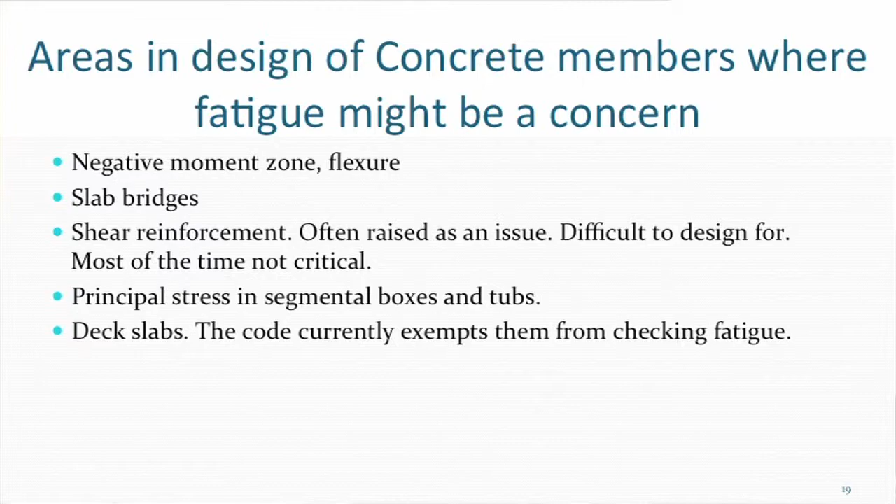T10 is the committee that deals with the concrete bridge specifications, Section 5 of the AASHTO LRFD bridge design specs. AASHTO is the American Association of State Highway and Transportation Officials. T10 is a subcommittee of the subcommittee on bridges. It's a very elaborate, detailed organization structure.

T10 is the committee that decides what to change in terms of design rules for concrete bridges, including the use of welded wire reinforcement. So a few years ago, probably early 2000s, about 10 years ago, we were asked by WRI, and we got additional funds from PCI, and we did elaborate testing from different sources to check on the fatigue resistance of welded wire reinforcement with cross welds in the wire or specimen, and without cross welds.

Now T10 is looking at a proposal from one of the giants of the industry, John Kulicki. He's the guy who developed the AASHTO LRFD specifications, so he has to be taken very seriously. He's now retired from Modjeski and Masters, but he carries a lot of weight, and he did a research project for extending the lifespan of bridges.

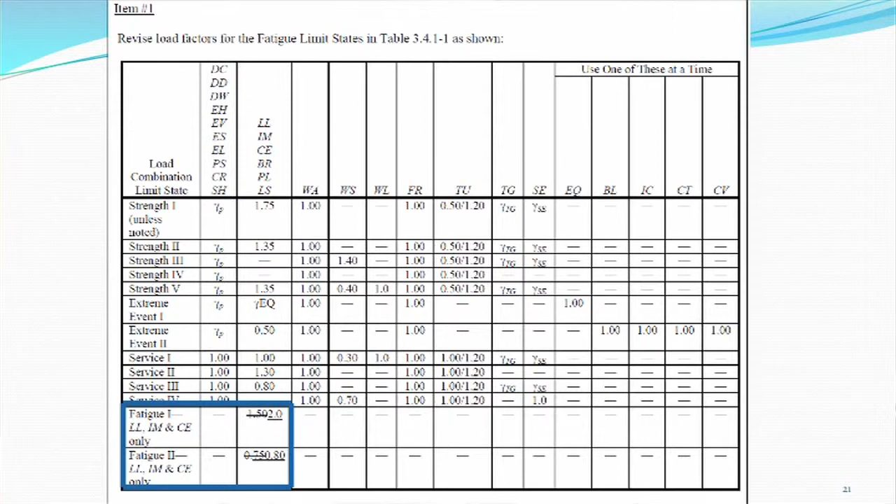The summary of it is this: as Todd said, for the fatigue 1 limit state, which impacts us here, the load factor is changing from 1.5 to 2. That's about a 33% increase. So the loads that you're designing your structures for are increased by the ratio 2 over 1.5 across the board, whether it's a concrete bridge, concrete structure, any transportation structure, concrete or steel. You take the loads and multiply them by 2 instead of 1.5. That's one effect.

The second effect: they took our beautiful fatigue formulas, if you call them beautiful because I developed them, and destroyed them.

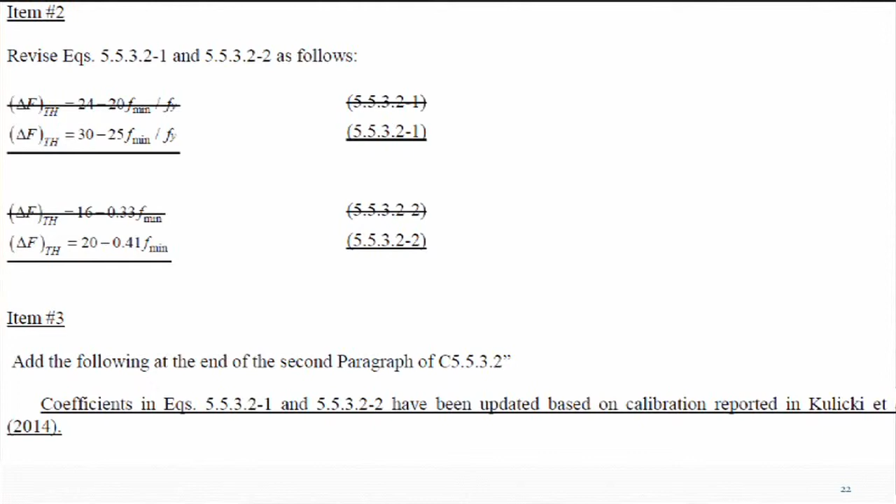What they did, and they have a very scientific justification which in my opinion is just to put stuff in there so they can tell the world they've done something, is they took the limits and increased them. So 24 becomes 30, and so on. This is the limit for wires with no cross wires welded, and this is the limit for wires with cross wires welded at the high stress zone, the high stress section that you're checking.

The good news is they're increasing the limit. So even though they destroyed my baby, this is a good thing for you because they increased the limit. So when they increase the limit and they increase the load, it's a wash. The load, the demand on one side, the capacity on the other side — I'm increasing the demand, and I'm also increasing the capacity by the same ratio. Okay, fine, if that's what you want to do. It's not going to affect us economically.

The alarming part about this is that when you look at the language as you move through the working agenda item, you see some tables in there that reduce the limits. These tables come from the original report that they submitted as evidence. So someone on T10, because that's all part of the submittal, is going to pick on this, because my associates in the company, when I asked them to review this presentation, said okay, there's inconsistency here — which one? So they picked it. So if someone on T10 says we want the low limit, then we're in trouble.

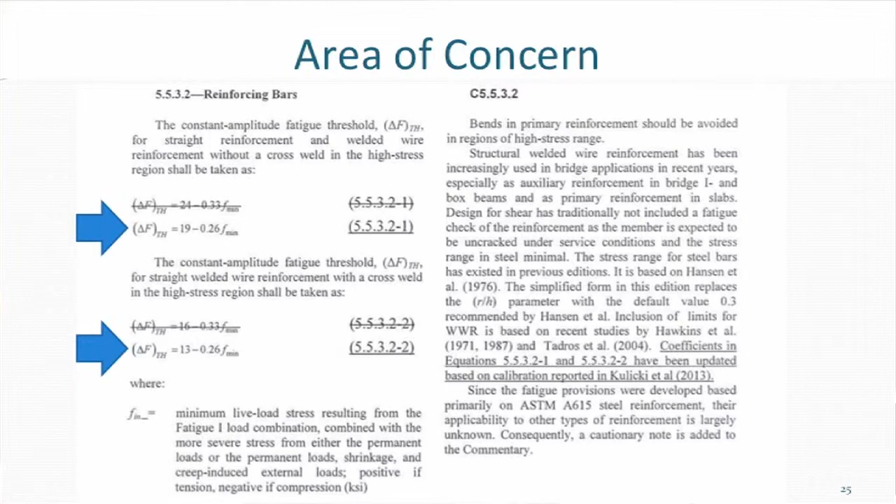That's why this has to be watched carefully. The reason I'm saying that is the justification they use, Monte Carlo simulation and some really fancy stuff, fancy words, life cycle analysis and all that stuff, is not really what we did.

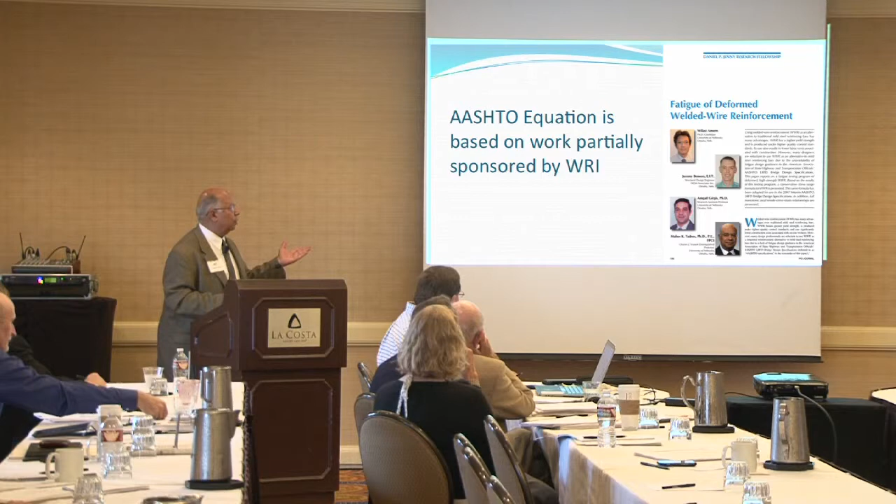What we did was very simple for the Wire Reinforcement Institute. We took a whole bunch of samples from a lot of sources, and we figured that the stress range plus one-third of the minimum stress has a lower bound of 16 KSI. So we said the stress range minus 0.33 F minimum, the live load 16 KSI minus 0.33 F minimum, is the limit of stress range. It's just as simple as that.

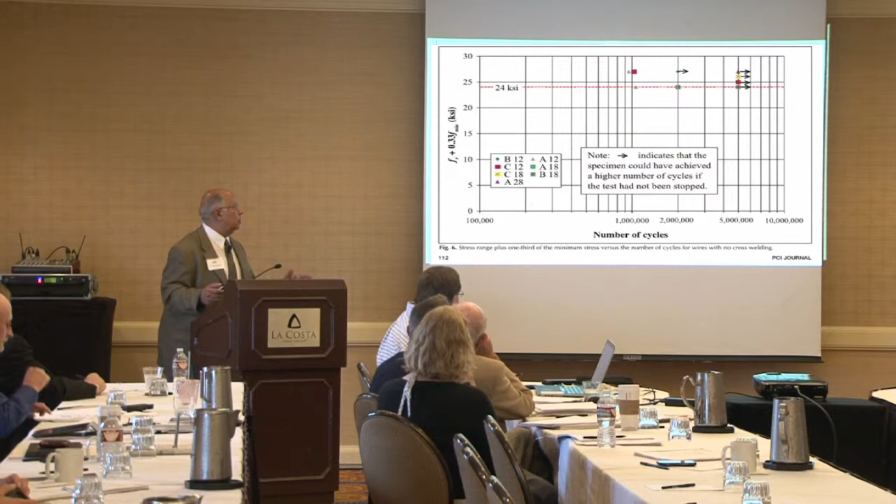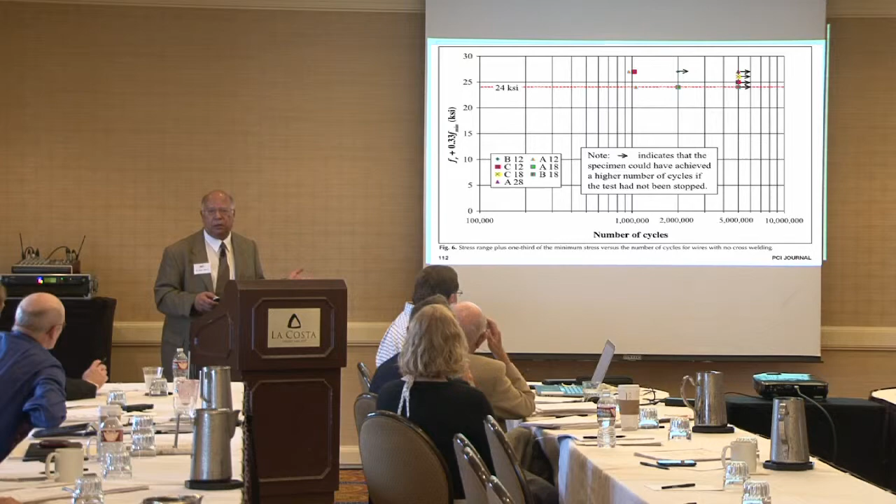And when you have wires that are plain, straight wires without any cross welds in them, the limit goes up to 24. So this would apply to bars, and this would apply to wire as well if you're not welding in the high fatigue zone.

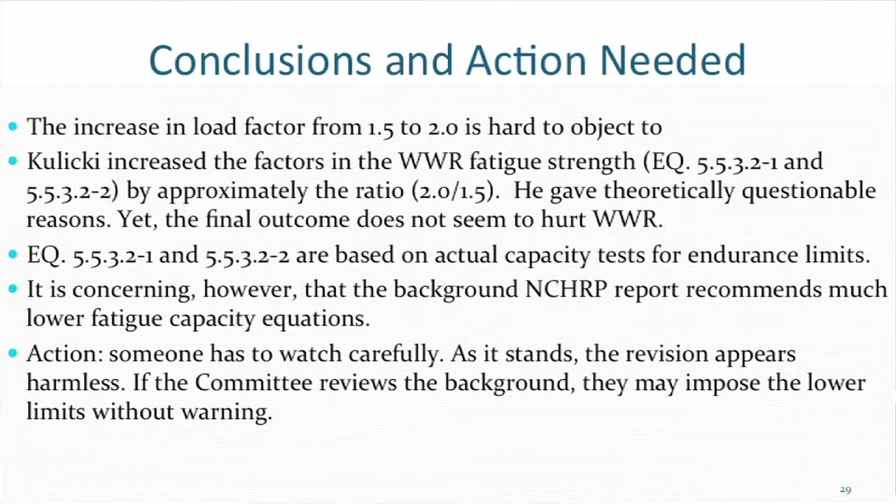So in conclusion, I'll leave this slide on here for a second. If you look at it casually, no action is required. If you look at it a little more seriously, you need to be very vigilant, you need to be watchful, and you need to attend these meetings to make sure that if they make the change, they stick with the change they propose in the working agenda item, not the background information attached to it.

It's probably a little bit on the light side now that we've gone through fatigue. There have been numerous applications in the past 20 years, and the credit goes to your very active members. I have to single out Dyke Starnes. Dyke is one of my idols, he really works hard. When I was in Florida in 2007, 2008, we teamed up and went to Tallahassee, and he's tireless. This has been a help to the whole industry.

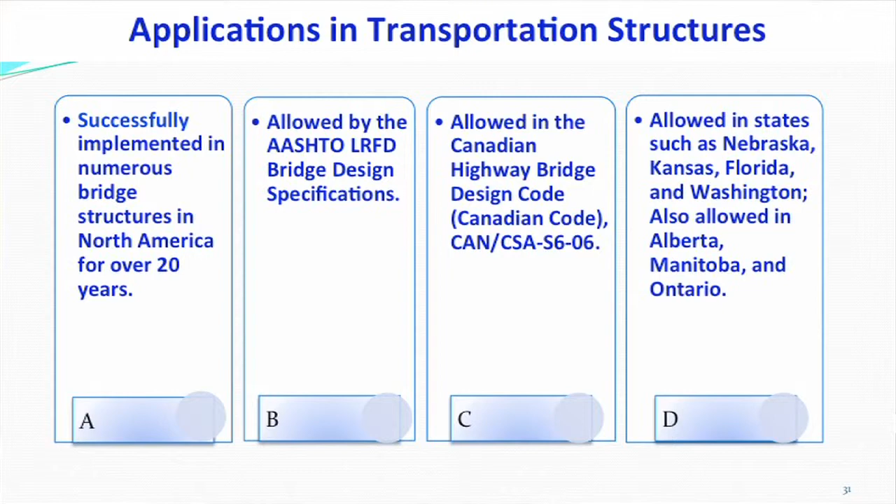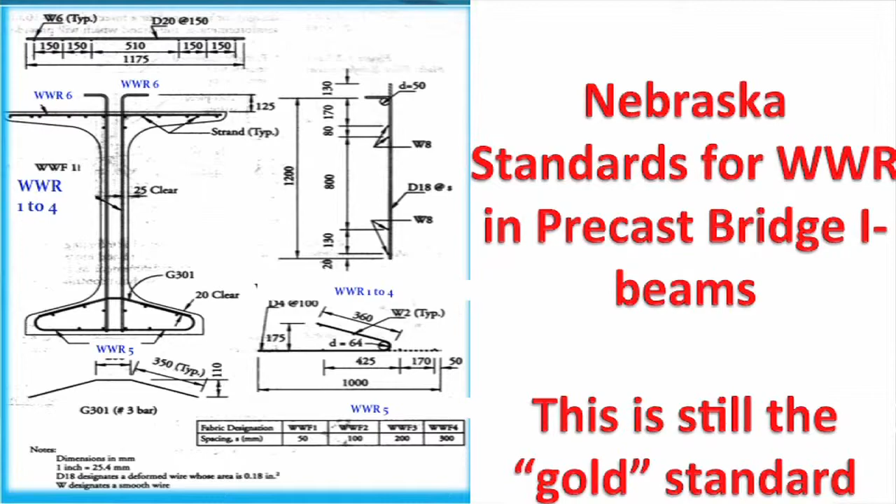And I also have to brag about Nebraska. This standard was introduced in 1992. I consider it the gold standard. It made it to the PCI Bridge Design Manual. It's what people use most of the time, unless they get to be too fancy. That's what people use in detailing I-beams.

You could see that everything here is welded wire reinforcement. Everything, nearly everything, almost everything. The only thing that's not welded wire reinforcement is this tiny number 3 bar. Everything here is WWR, 2 U-shapes meshed together. This is the main reinforcement, WWR. The top flange reinforcement is WWR.

You see that you have 2 wires at the top, minimum 2-inch spacing. These happen to be a little bit longer. And these are 2 wires at the bottom. An excellent detail. It has served well.

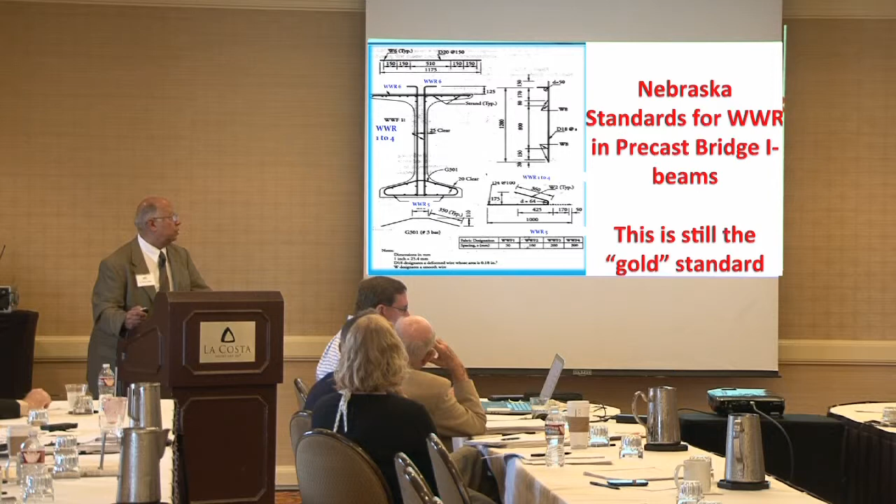I was on sabbatical that year with a friend at HDR's office in Omaha, and we sat down and developed this standard, and it worked very well. It has worked very well. In the PCI Bridge Design Manual, that's what's guiding people to do.

A recent development here that I think I like, but I need to get your reaction because it hasn't been done before, this is going to be the first time it is done. If the concrete option wins and if this detail is adopted, it is to take the cross wires and put them above the cross section. When you do that, you have more anchorage of the wires.

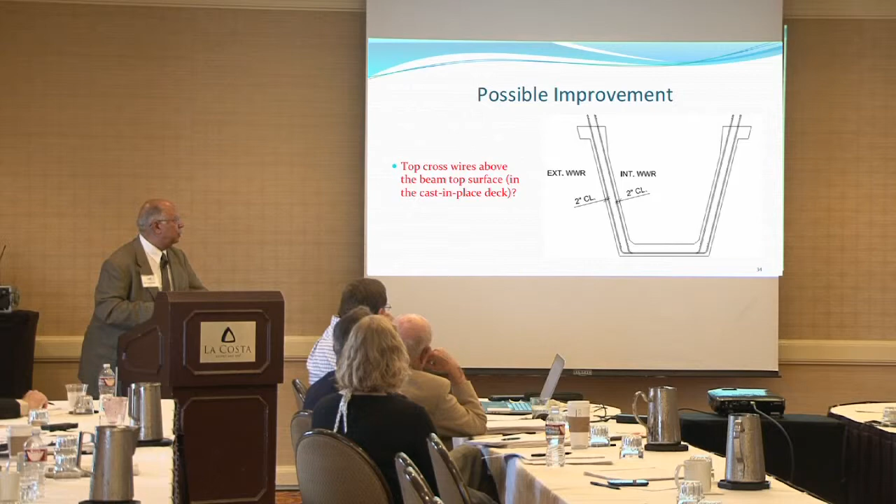And we have a kind of a stay-in-place deck form here. So the stay-in-place deck form will be below these anchors and they will go into the deck. So that's a detail that we think we've already gone through the initial screening and it seems that everybody's happy with it. The rest of the details are very similar to what's being done now on Bogey Creek Bridge, supplied by InSteel. One U-shape here and one U-shape here.

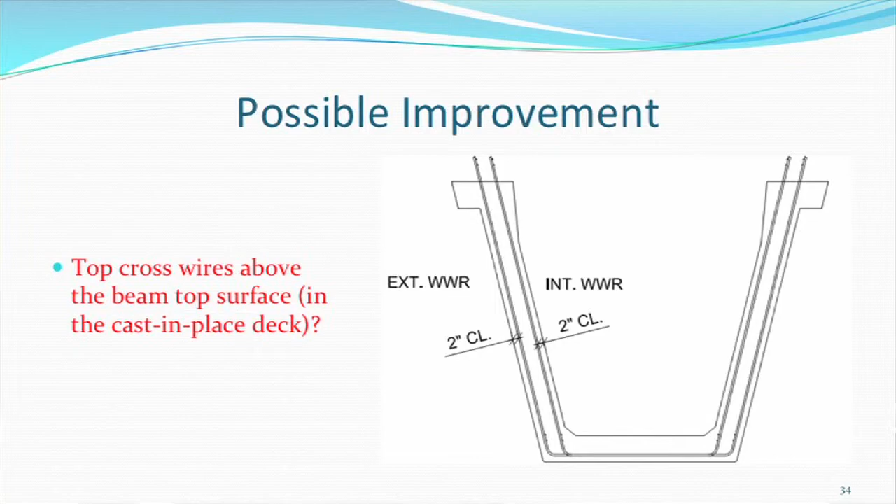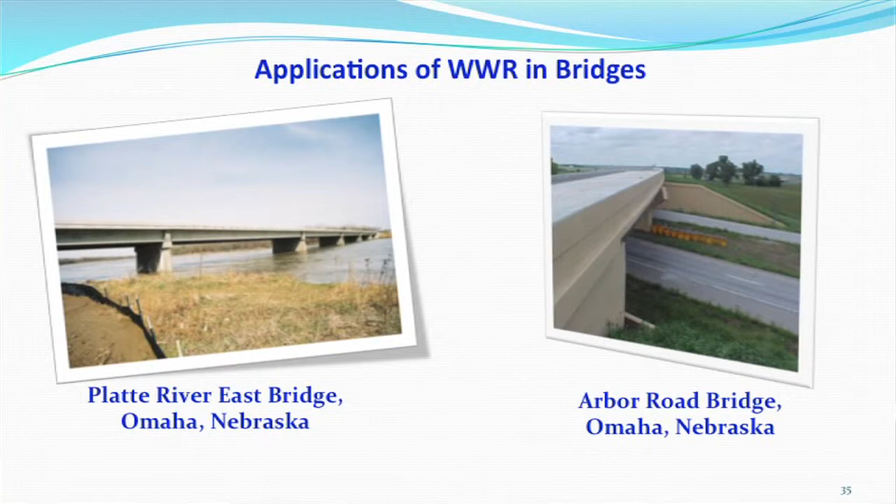So applications on bridges, Platte River East, Arbor Road, so many bridges, it's the standard in Nebraska. Herb Gray Parkway, that is a major $1 billion plus project in which the welded wire reinforcement was introduced by the designer in the design stages, but then our company added a lot more because they were only doing welded wire mesh in the webs. We converted everything to welded wire mesh.

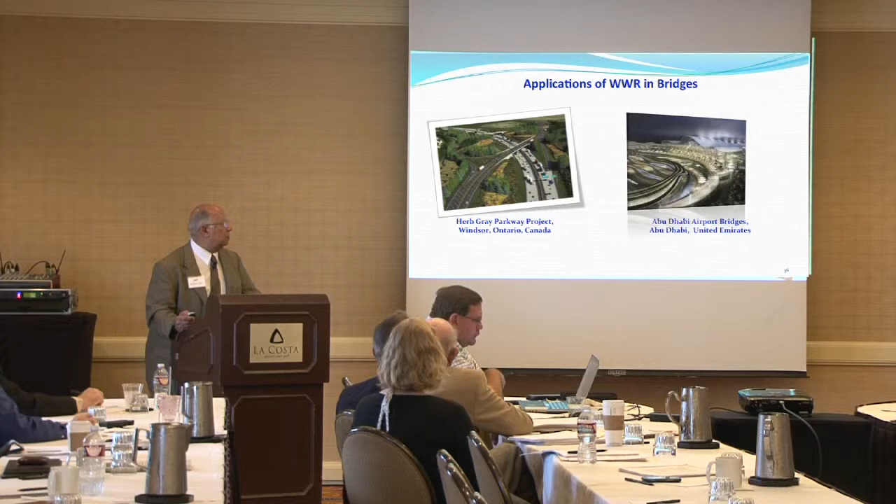And then when you add to this the fact that production of the I-beam itself in the precast yard gets reduced, the labor gets reduced by 30%, 40%. That's your selling point. Don't sweat the per pound cost of your material. That's not the issue. The issue is to convince designers to use it. And if designers use it, everybody will fall in love with it. That's the issue.